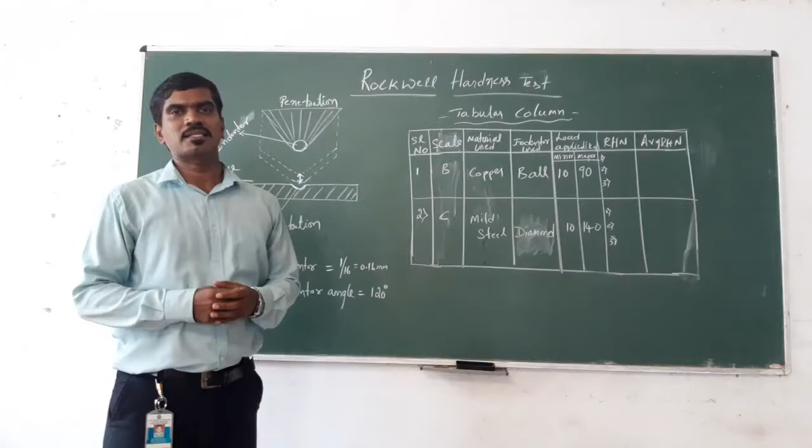Hardness is a resistance against indentations, marks or scratches. So here first we have to know the aim of the experiment. The aim of the experiment is to find out the Rockwell hardness number of the materials.

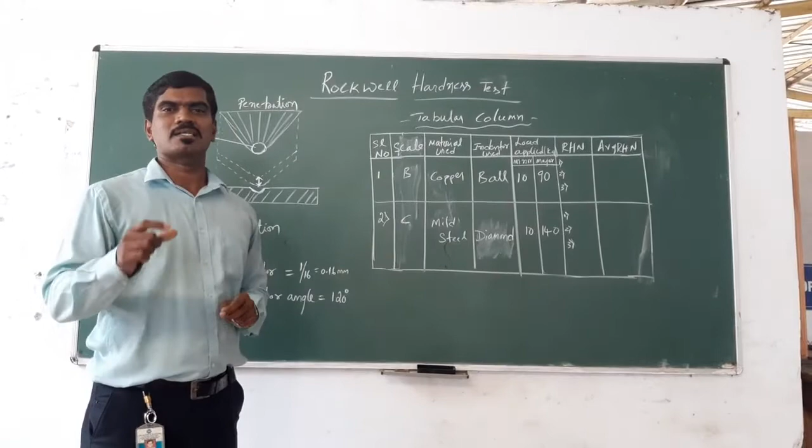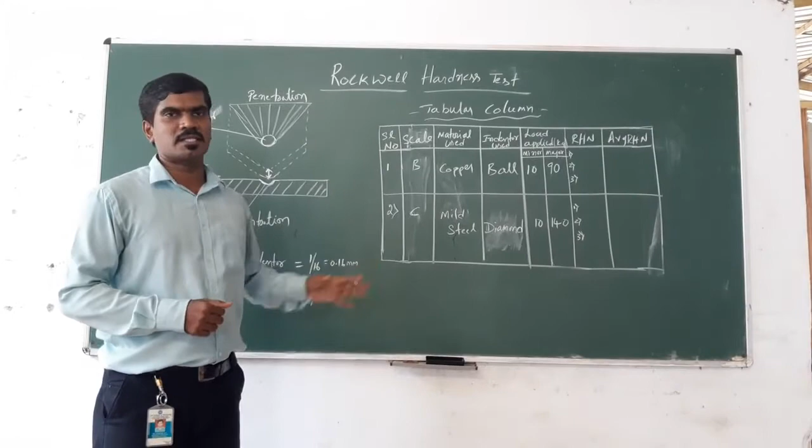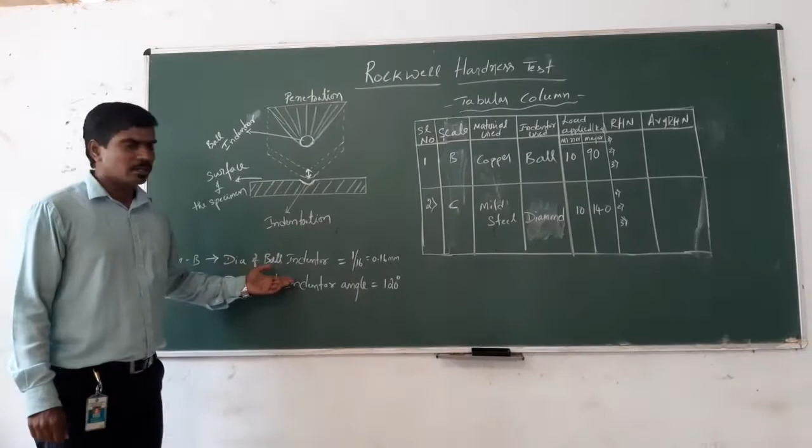The apparatus used for this experiment is the Rockwell hardness testing machine, a ball indenter, and testing specimens. First we come to the observation. There are two scales, scale B and scale C. For scale B we use a ball indenter of diameter 1/16 inch, or 0.16 mm, and for scale C we use a diamond indenter of angle 120 degrees.

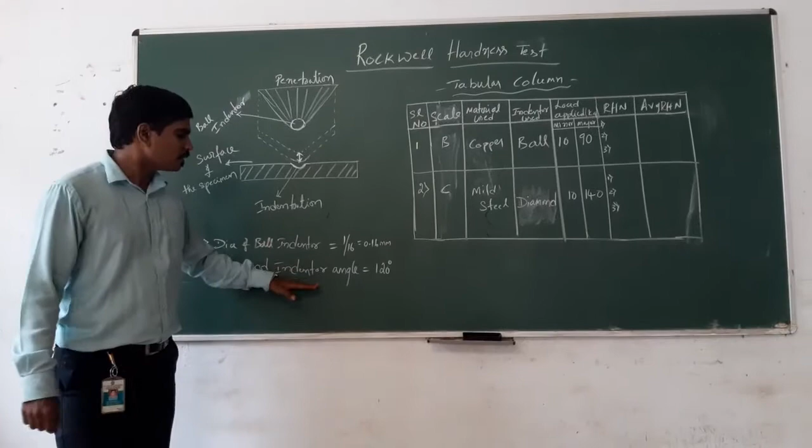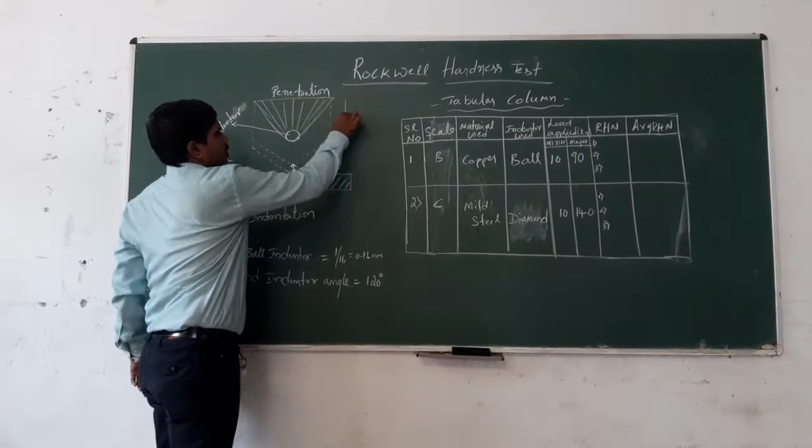This is a pictorial view of the Rockwell hardness testing. This is the specimen and this is the indenter, and this is the penetration against the specimen, and this is the indentation of this indenter. Now come to the tabular column.

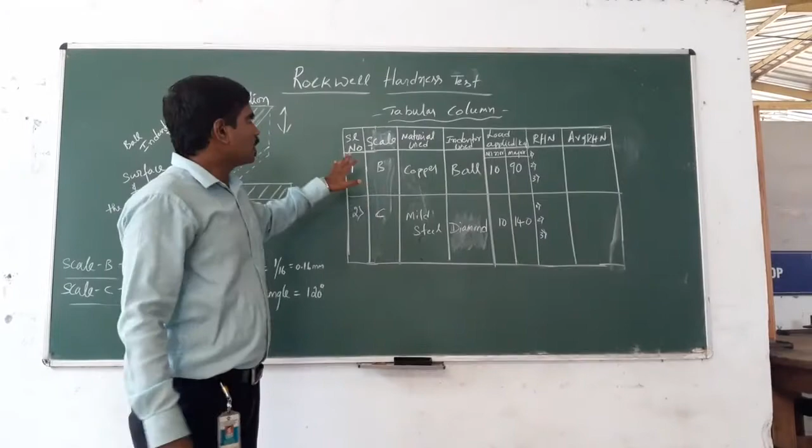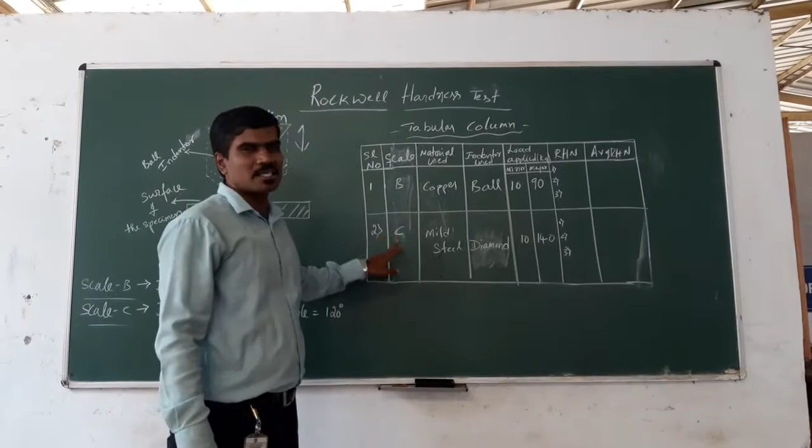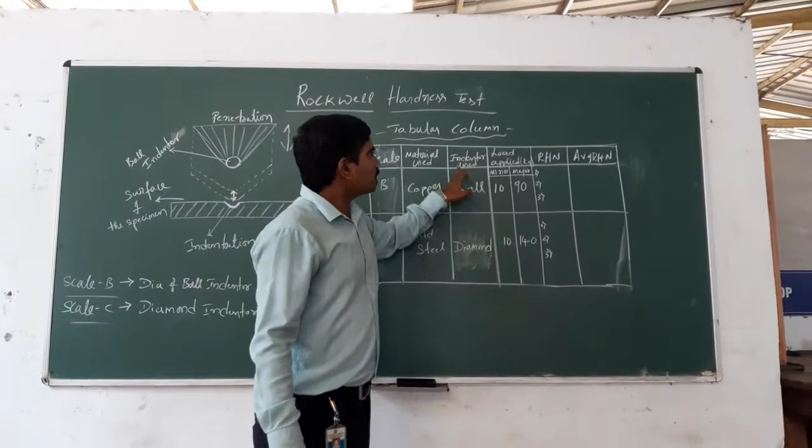In the tabular column, the first column is serial number, that is specimens 1, 2, 3, 4, 5, and the second is scale. We use only B scale and C scale. For the B scale we can use copper or aluminium, and for the C scale we have to use mild steel. The next column is indenter used. For the B scale we use the ball indenter, and for the C scale the diamond indenter.

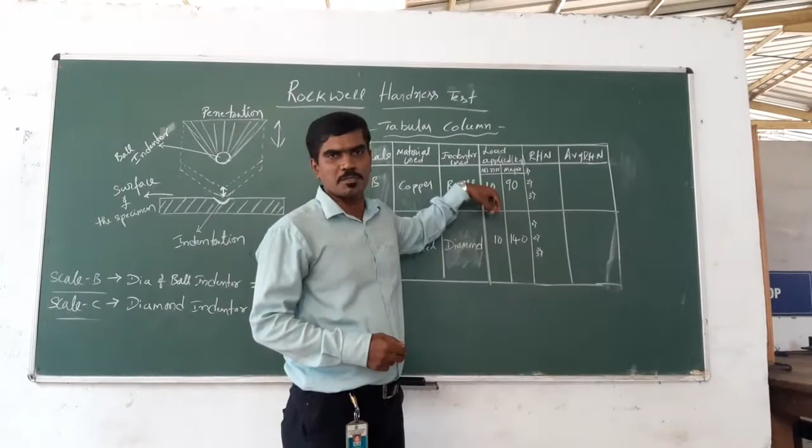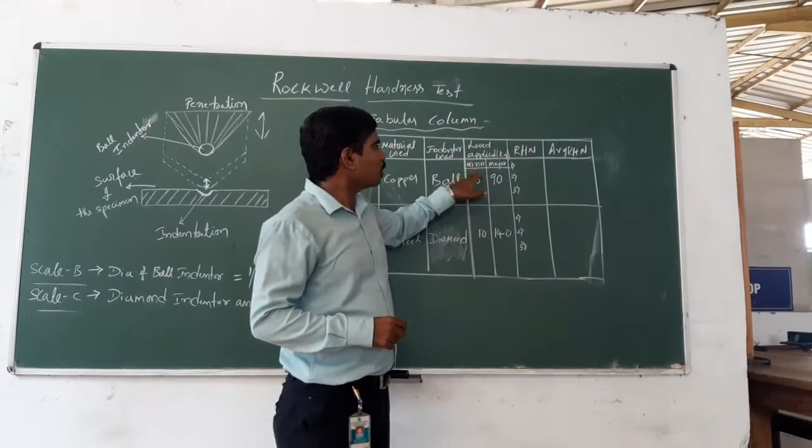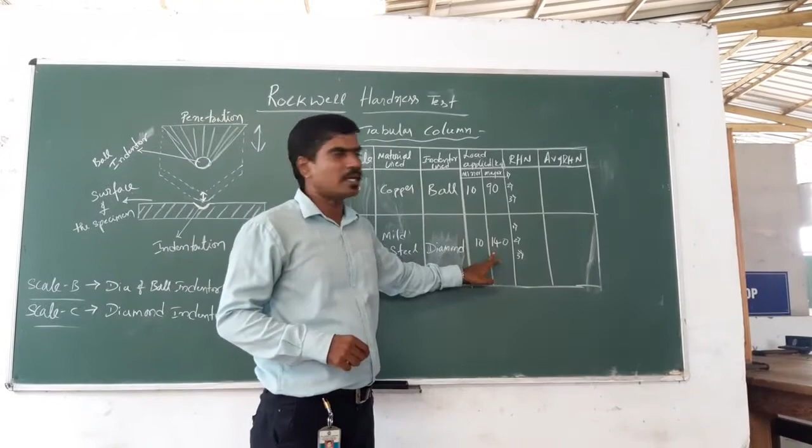There are two loads, minor load and major load. The minor load is the load pre-applied on the specimen, and the major load is the load applied after the specimen is placed. The minor load is 10 kg for both B and C scales, and the major load is 90 kg for the B scale and 140 kg for the C scale.

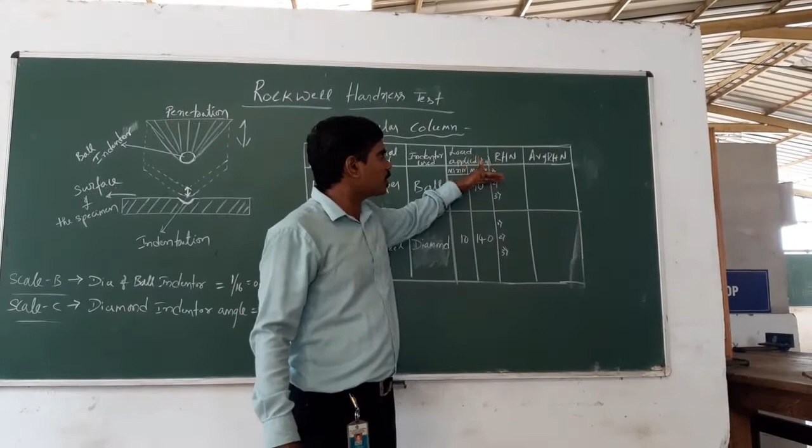The next column is RHN, Rockwell hardness number, and here you have to take three readings, reading 1, 2 and 3, and the last column is the average RHN. You add all three readings and divide by 3 to get the average number.

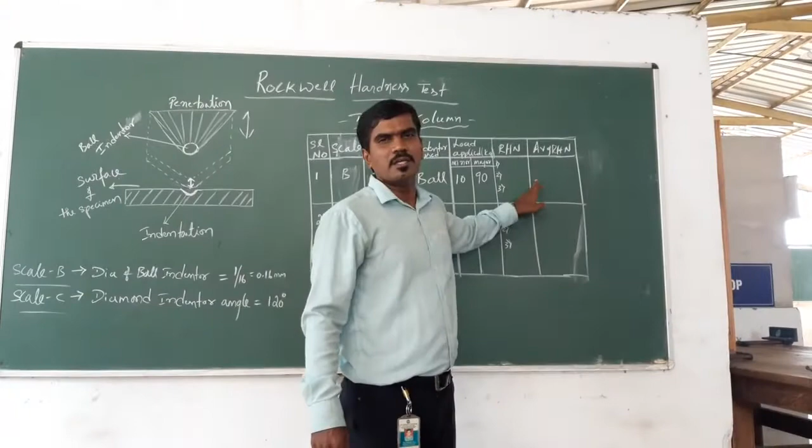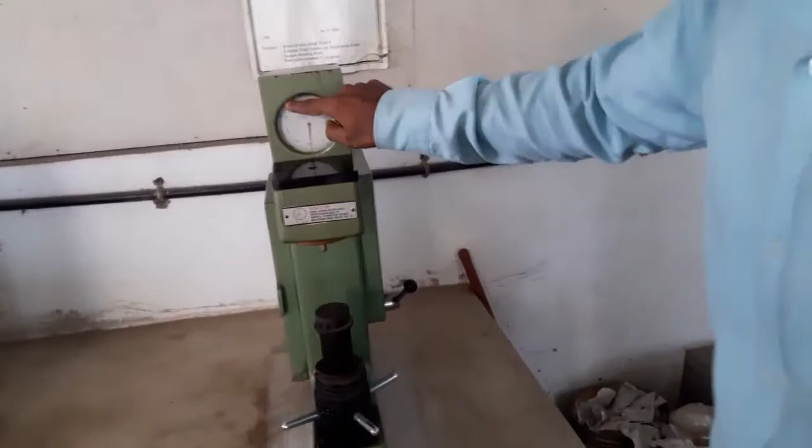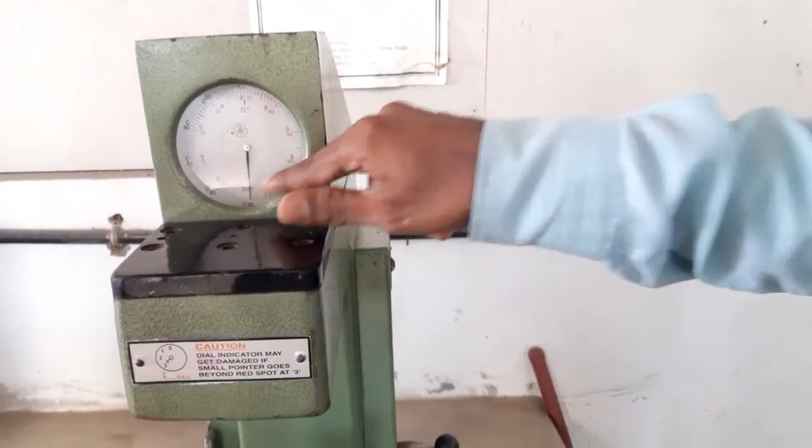Next, come to the experiment, the hardness testing machine. This is the scale we are using. There are two types of scale: B is in red color, and C is in black color. For copper we take the B scale readings, and for mild steel we take the C scale reading, in black color.

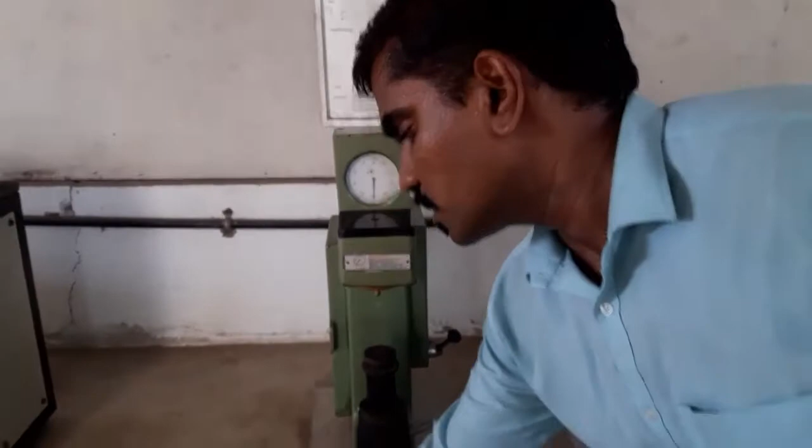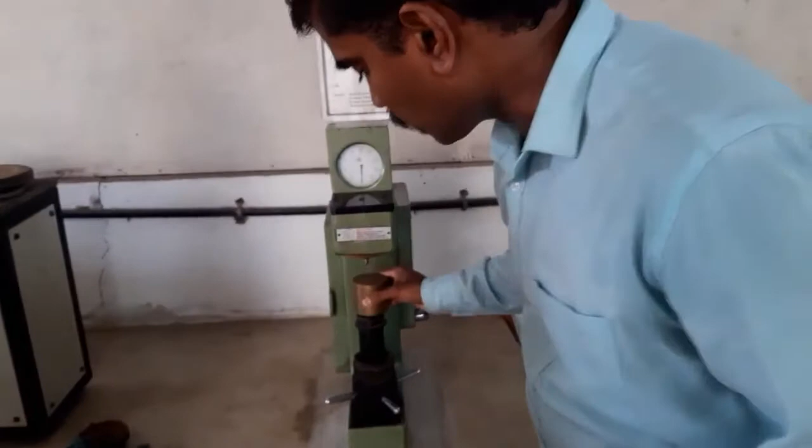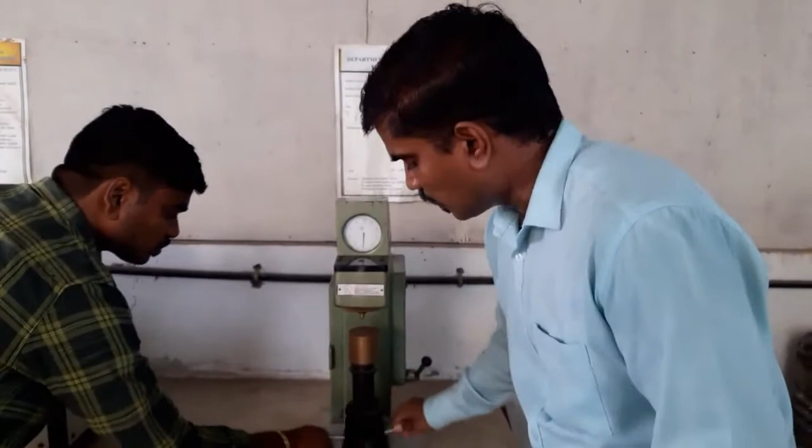This is a copper specimen. First we have to prepare the specimen surface. Next, place the specimen on the work table. Next, we rotate this lever in the anti-clockwise direction till it reaches the indenter. This is the ball indenter we are using for B scale.

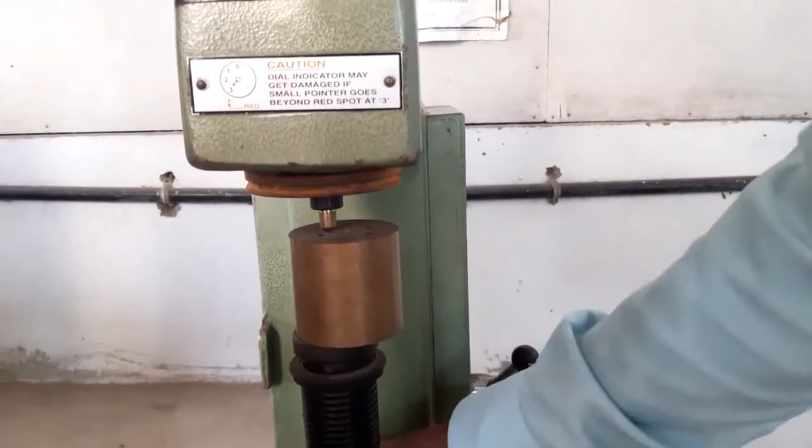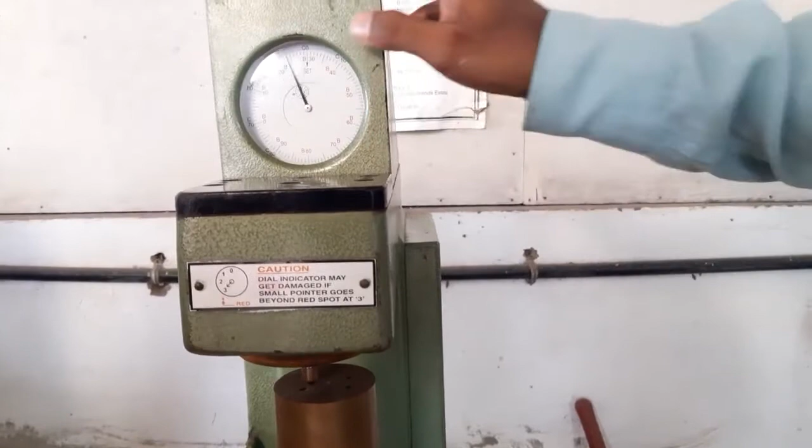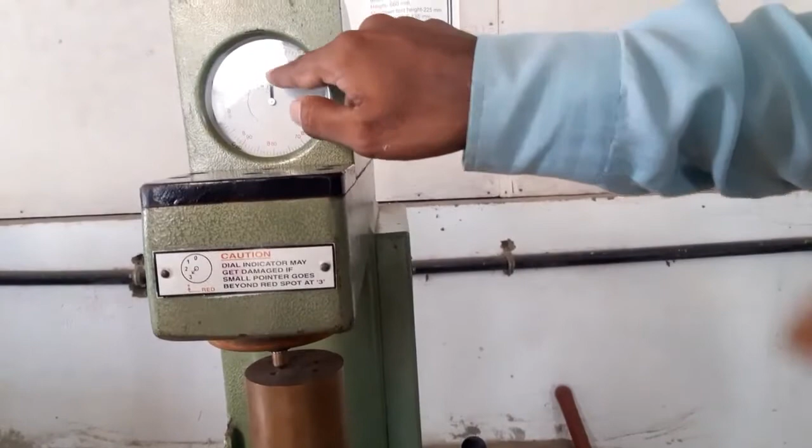That will rotate, and see here in the small scale, tighten it. It should come between 2 and 3. Till that we have to rotate this lever. Once it reaches between 2 and 3, the major dial is also at the set point. See here, this is the set point. Now the setup is ready for conducting the experiment.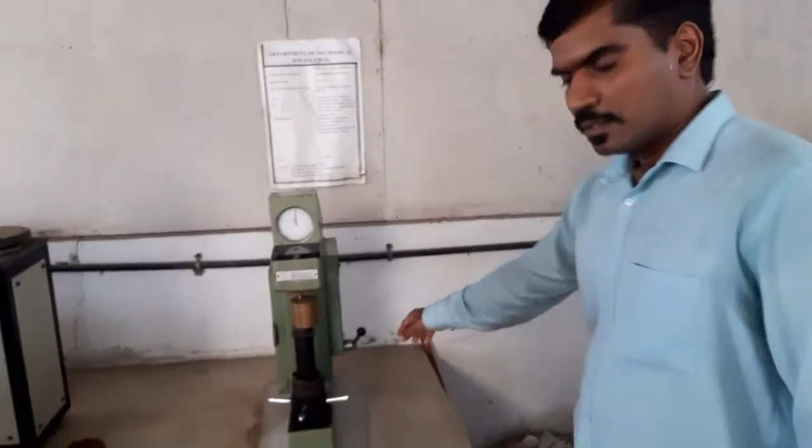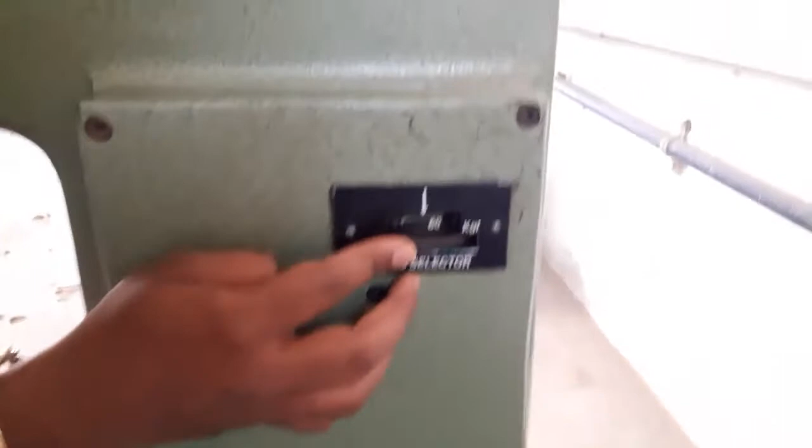This is the lever used to apply the major load, and here we set the major load. We set it for 90 kg because we are using the B scale. Minor plus major is equal to 100 kg total, and this is the lever we are going to apply on the specimen.

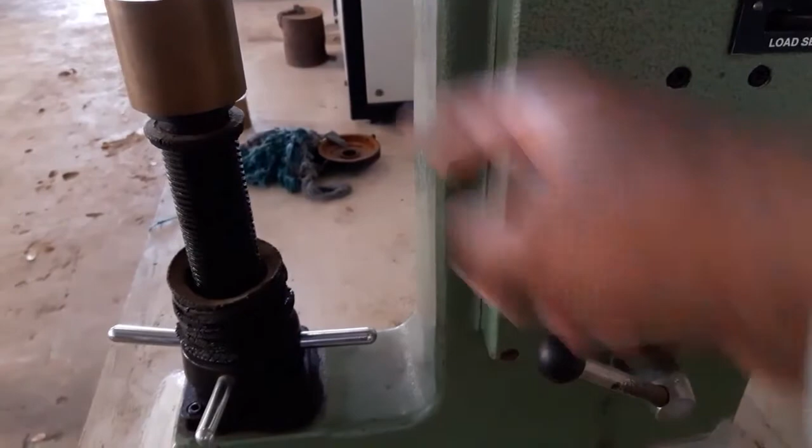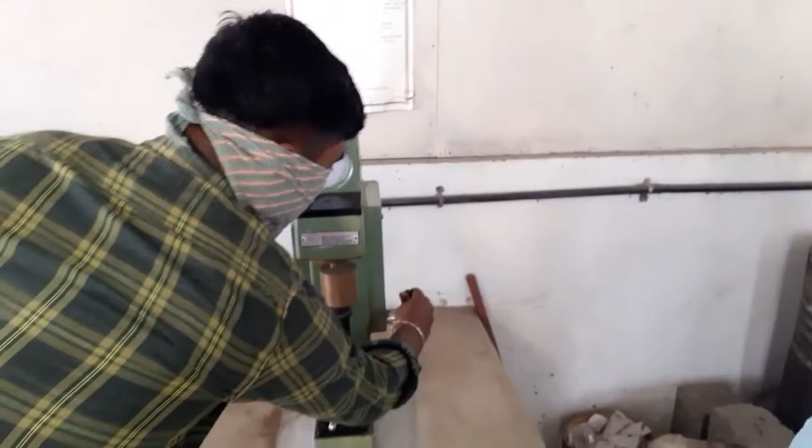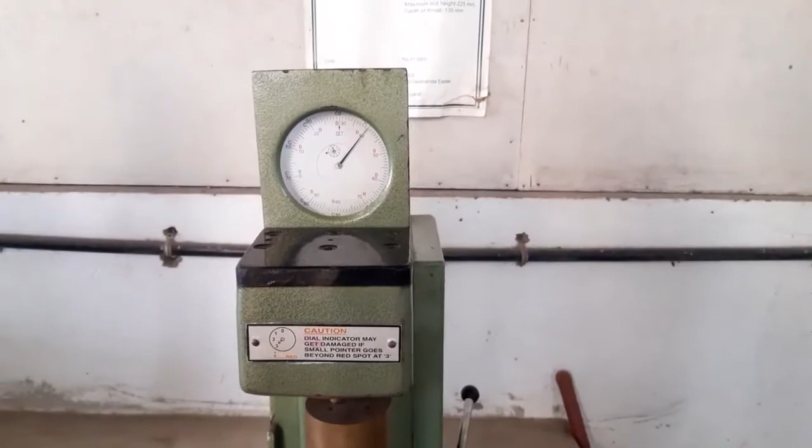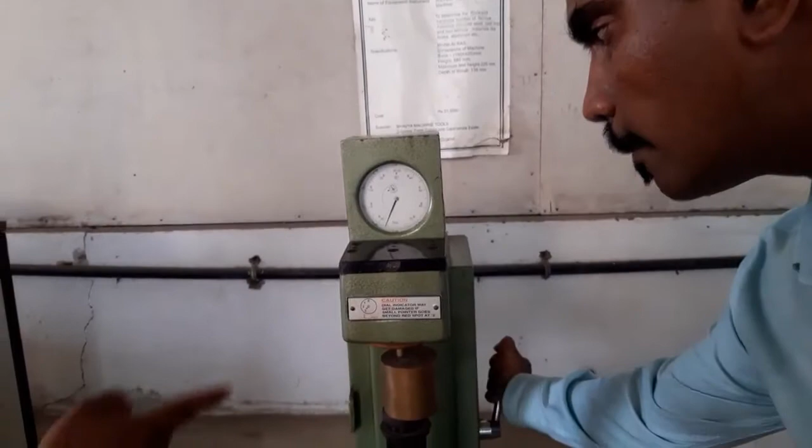Next step is to slowly release the lever so that we apply the major load. You can observe how the dial gauge is rotating. Wait for 30 seconds so that it stabilizes, and after that slowly release the load.

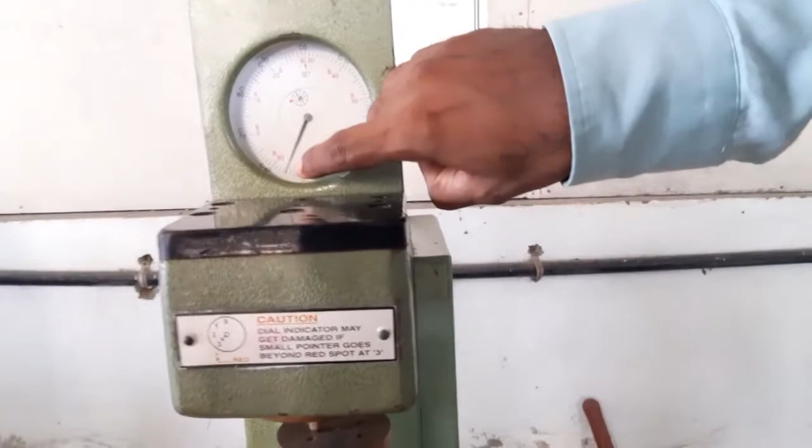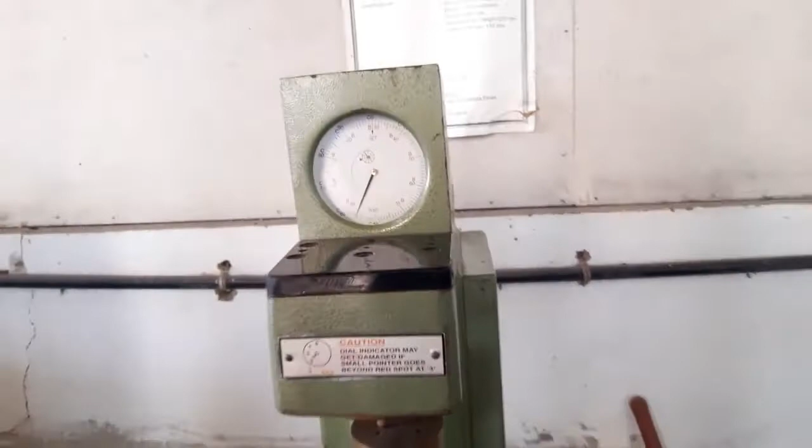Now you can note down the reading. It is nearly 86 to 87, because we consider the B scale in red color, so it is between 86 and 87. You can consider 87, no problem. This is how we note down the reading.

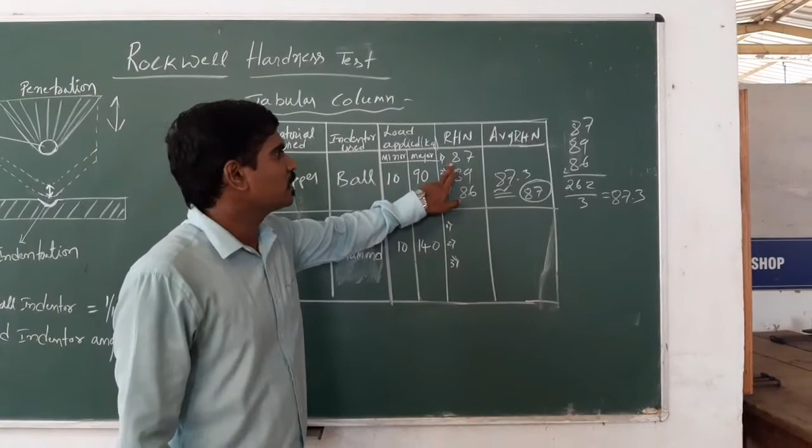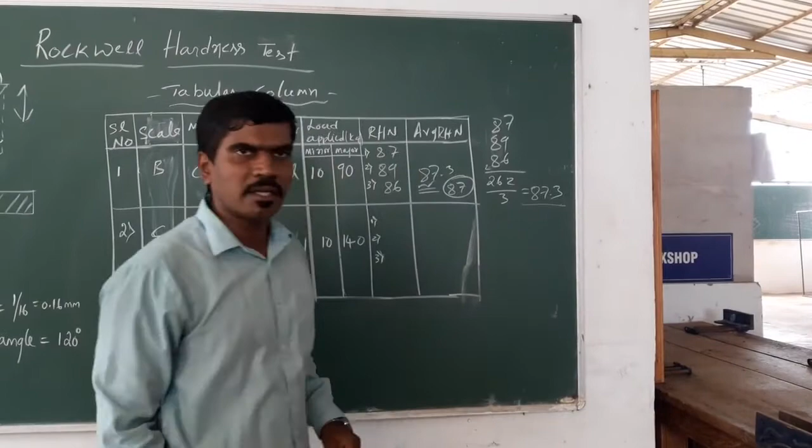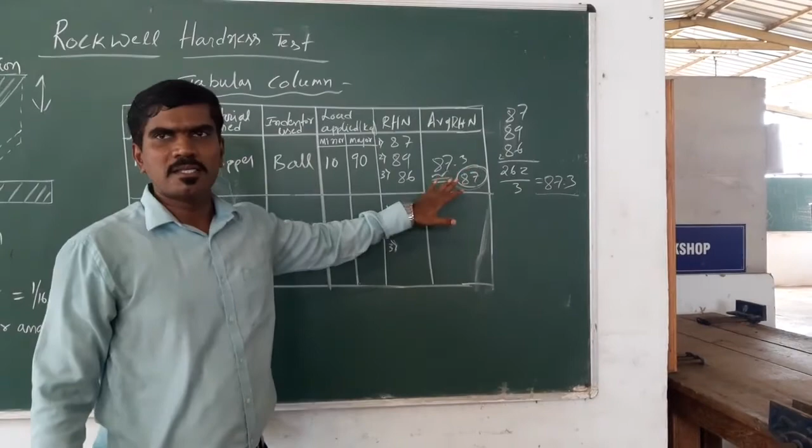Of the experiment, we note down the readings. First reading is 87, second is 89, and third is 86. Adding all readings gives a total of 262, divided by 3 is 87.3, so the average Rockwell hardness number for copper is approximately 87. The conclusion is the Rockwell hardness number for copper is 87.